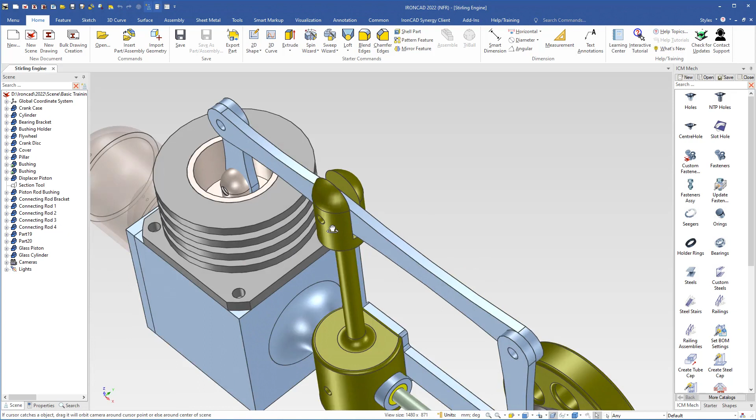For example, this connecting rod should be placed in the center of this notch.

I will select this connecting rod at part level, then turn on the triad, and we have to move the triad to the center of the connecting rod.

I will select this face and this edge. So now it is in the center of the connecting rod.

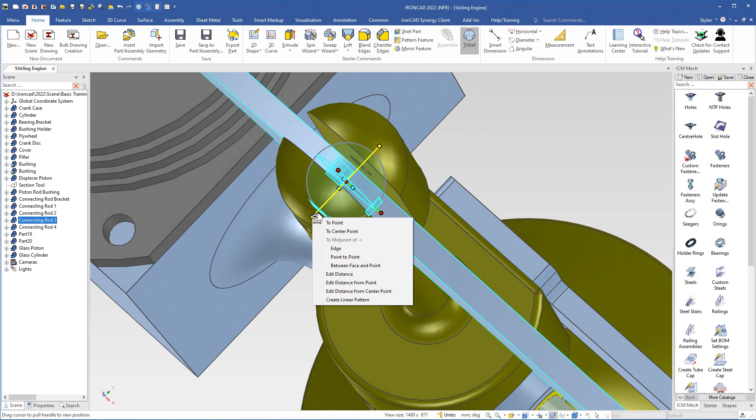Then I lock the triad and right click this handle again, choosing between face and point. Now I will select this face and this edge, so the connecting rod is placed in the center of the notch. Then I turn off the triad.

Then we go over to this side and see what we have to do here. I have to move this connecting rod a little bit, so I will select it and turn on the triad.

Then I will right click this handle to choose to point, and I will click on this face. Then I will turn off the triad.

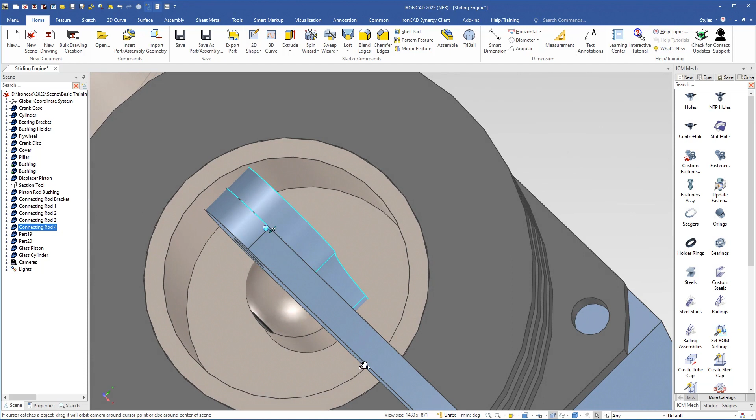Then we have to make some changes down here as well. So when this connecting rod is selected, I will shift select the bracket down here, then use hide unselected by pressing Ctrl Alt Space.

So now it is easier to make the adjustments. I have to select this cut extrude.

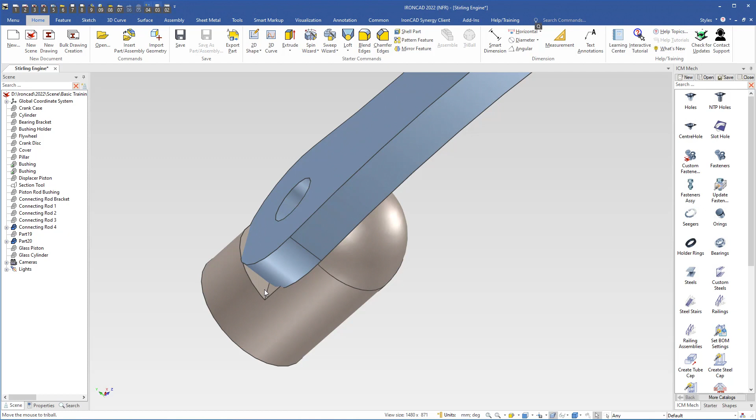A quick way to select an IntelliShape is to press the Alt key and then left click. Alt and left click, and you will select an IntelliShape.

So now I will grab this handle and use the Shift key to snap to this side, and I think I have to make it a little bit deeper here.

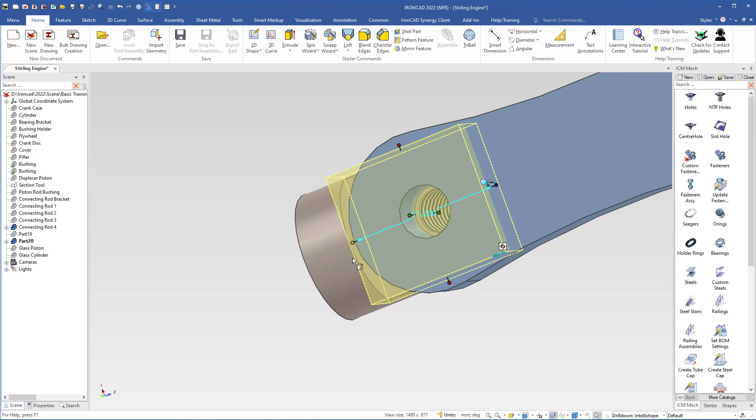So I will drag a little bit and make it 11.2, hit enter, and that's enough. Then I deselect and use Shift and Space to show all.

Now we will come over to this side and see what we have to do here. I have to move this connecting rod, so I will select it and turn on the triad.

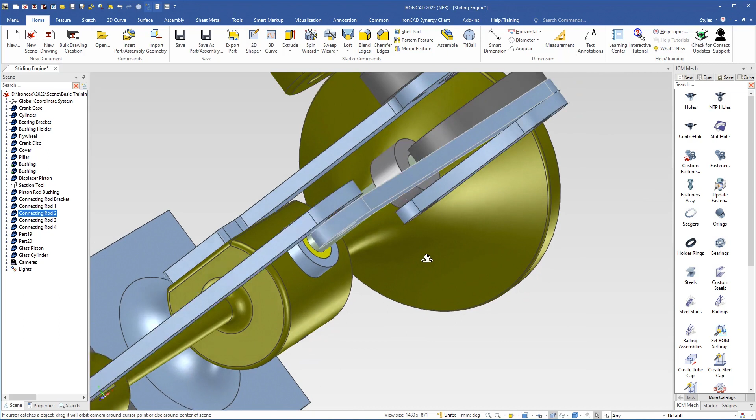We have to move the triad to the other side, so I will unlock the triad, right click this handle and select to point, and I will click here on this face.

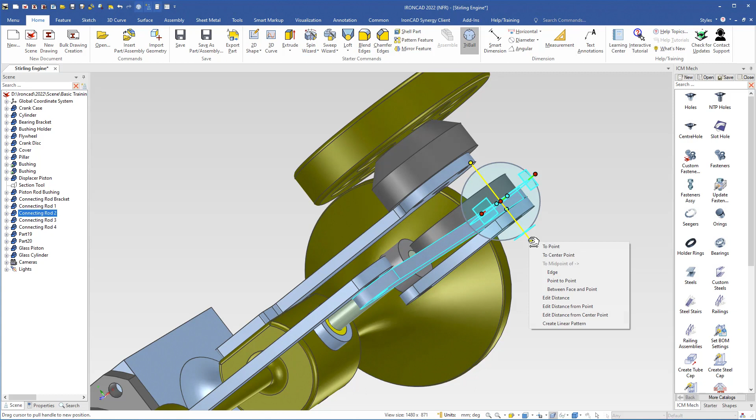Then I lock the triad and right click this handle and select to point, and I will click here on this face.

Then I turn off the triad and continue down here. So we see that I have to move this connecting rod and also this crank disc.

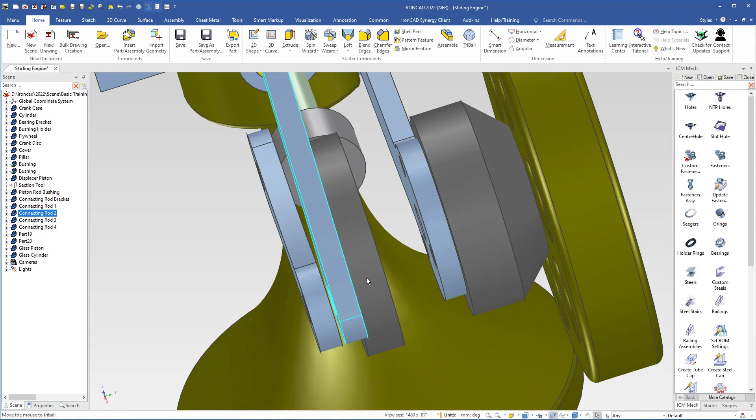But I will start with the crank disc, so I will select it and turn on the triad. We will move the triad to the other side, so I will loosen the triad and right click this handle.

I choose To Point this side, then lock the triad and right click this handle and choose to point and this face, like so.

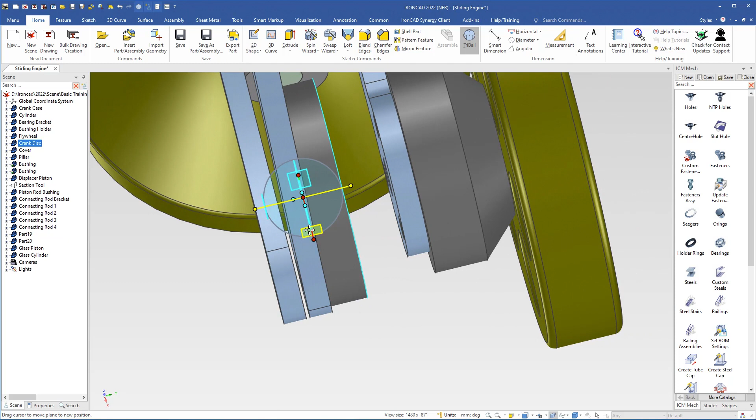Then I turn off the triad, select this connecting rod and turn on the triad, right click this handle and choose to point, and click on this face, then turn off the triad.

So now we have to remove some material here on this bracket, and we know that there is a cut extrude here, so we select the bracket, come over to the scene browser, expand the bracket, and find the H block or the cut extrude.

So we select it. Now we can grab this handle and use the Shift key to snap to this side here. So now we have removed enough material.

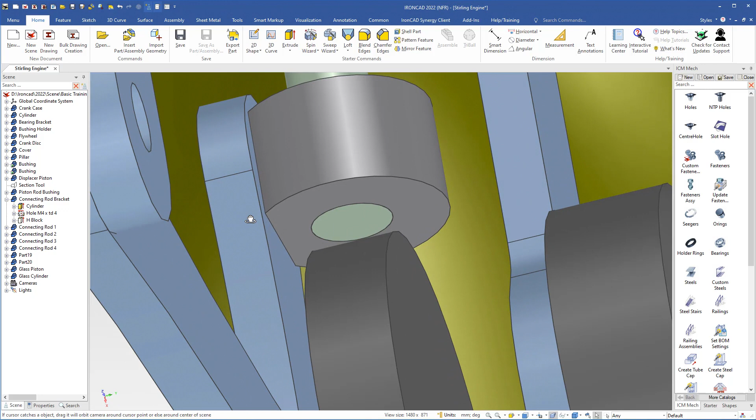So now we have made the adjustments to the connecting rods, moved the crank disc, and also removed some more material here and also here on this bracket.

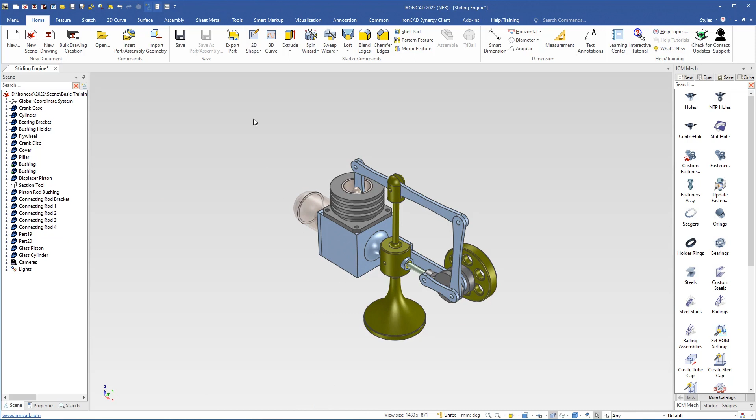Then I move the camera to top front right and fit scene, and I will save the scene here so we can continue in the next video.